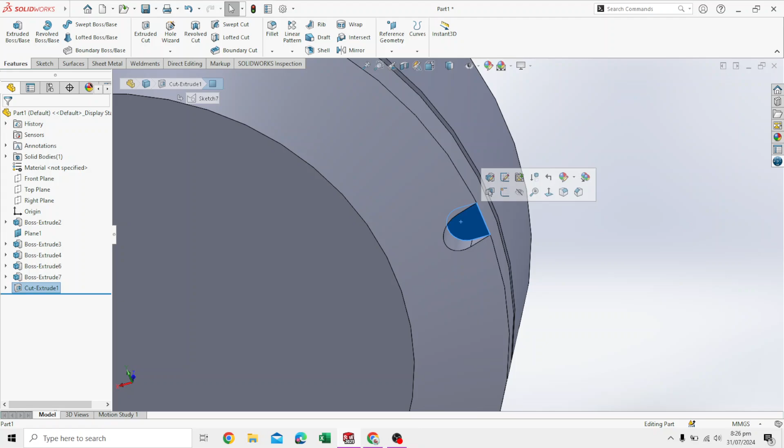Now we will click on this surface, this little cut we made in the previous part of the video, and go to sketch. Zoom in and hold your cursor here so it reveals the center of this curve. We need to draw a circle at the center of this curve. After you select a feature, select the circle and then hold your cursor here so now it shows the center.

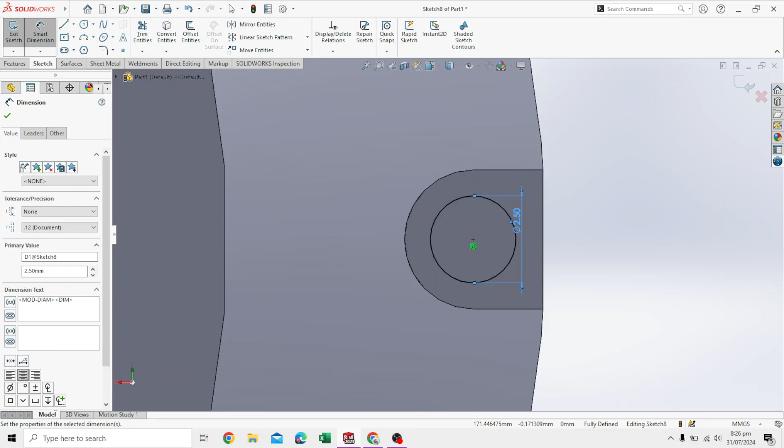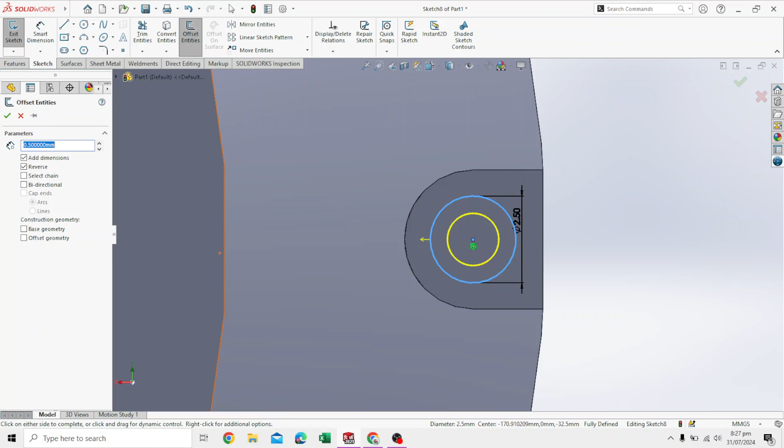We will draw a circle and use a smart dimension, give it a value of 2.5, press enter, and give it an offset of 1 millimeter, and it should be inverted. I think 1 millimeter is way too small, maybe 0.5 millimeters. That's better. Give it an offset and reverse the direction, otherwise it's going to be outside. We need it inside. Give it an offset of 0.5, and okay, this is neat.

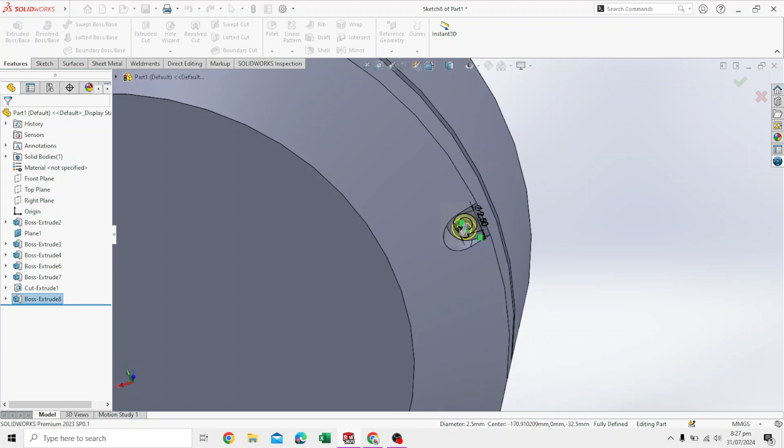This is going to be basically the nut that's usually placed in this kind of indent. We go to features and extrude, move that out by 1 millimeter, press enter, say okay. This is what I need, this is what it's going to look like.

Now we will go to the linear pattern drop down menu and go to circular pattern, first to specify the direction. So the direction is this surface, and the feature to specify the number, how many you want - 7 of these - and then specify the feature. The only feature currently selected is the nut, so we also need from the drop down menu this extrude that we cut out from this surface, and we need a total of 7 of these.

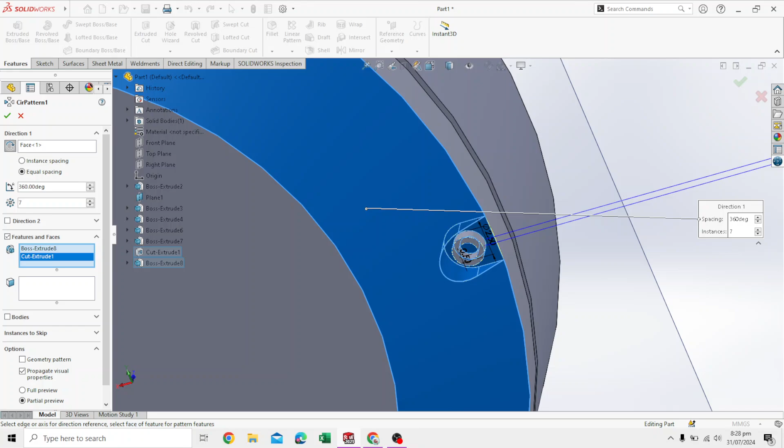There you go, it's showing in the preview. This is what it's going to look like. Let me see if 9 is better, or a different number of these looks better. Maybe 12, because these cuts are quite small.

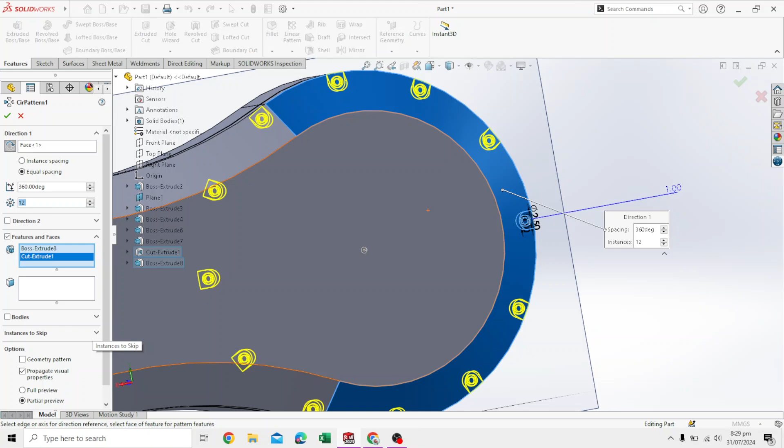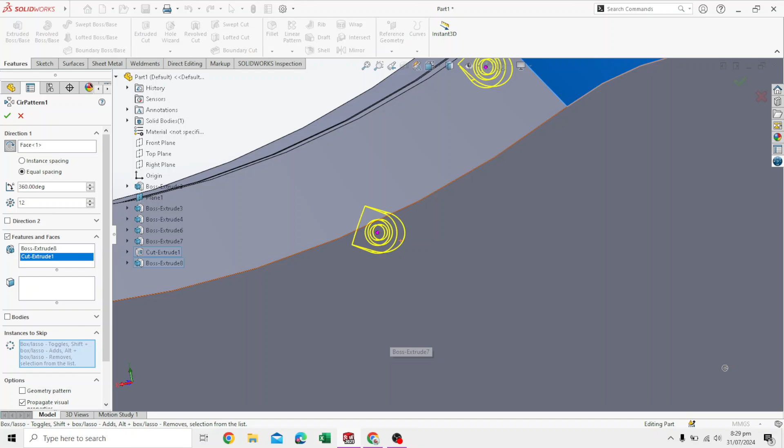I'm going with 12. There is a drop down menu in the left window called instances to skip. You click that and you will see these pink buttons appear between this, so we'll skip that one. Let me see if we have to skip that - I don't think we have to skip this one, it's sort of in line with the others. So skip this one and skip these. The rest are in line, the rest are looking great. Say okay, this is what we need, and there you go. This is sort of the pattern that's created with this circular pattern feature.

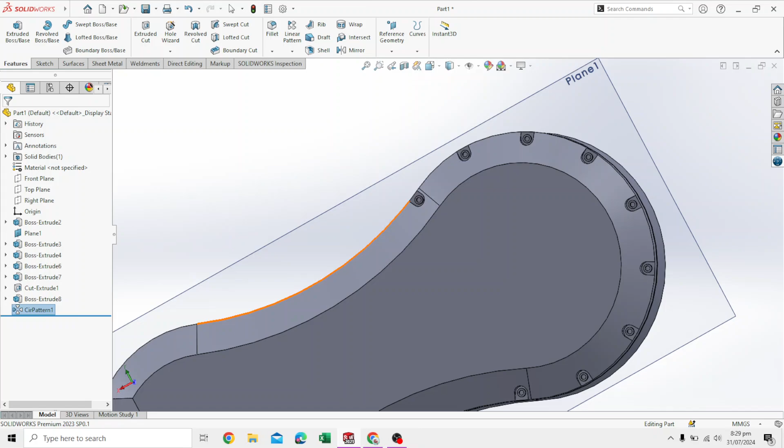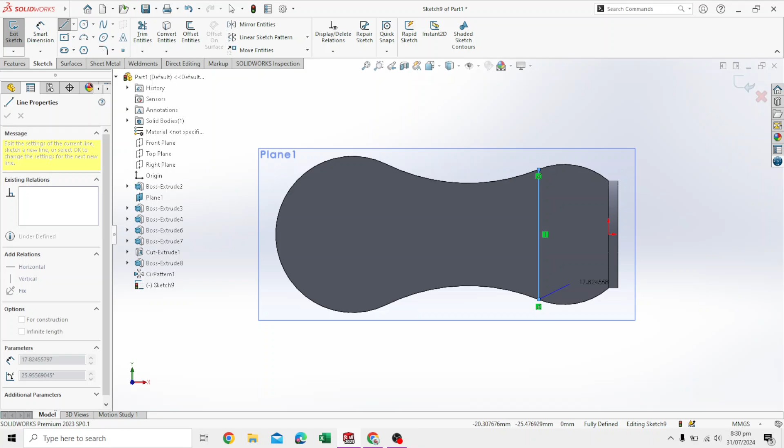Now we will move on to the back of this and say sketch. In the sketch we will draw a line - if you hover here you will see this point - move from this point to the other side, and there will be another point similar to that. This is the line we drew, and click on this face, basically this entire face, we need this all, and say convert entities. So now we have a drawing that looks like this.

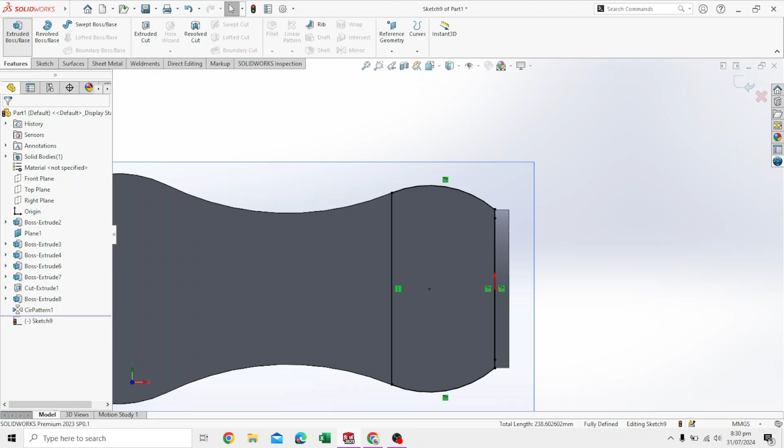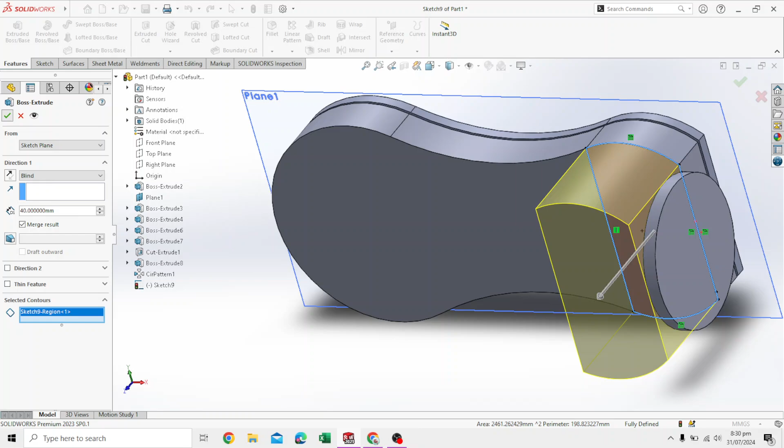Go to features and extrude this by clicking here. This is what we need to extrude, and give it a value of 40 millimeters, so it should come up to the edge of this circle. We say yes, this is what we need, and okay. This is what you should have by this point in the video.

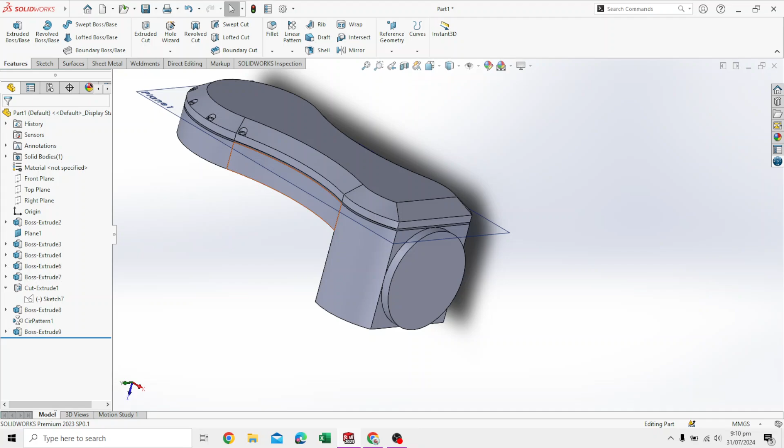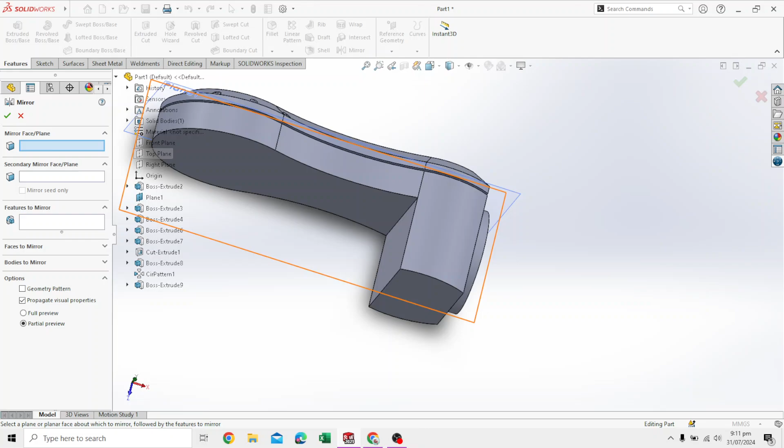Moving forward, we've already extruded this. We will basically mirror this entire body onto this side as well. Let me use the mirror command to move this entire structure onto this side. The mirror, and then obviously the mirror face or plane about which we need to - we'll open this drop down tree and select this plane, the front plane.

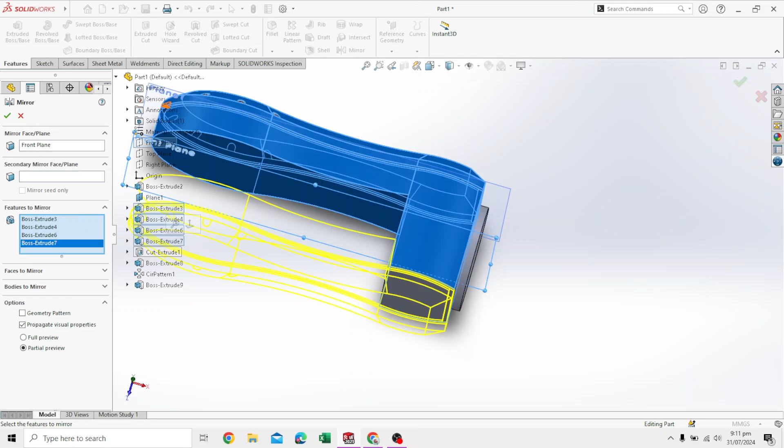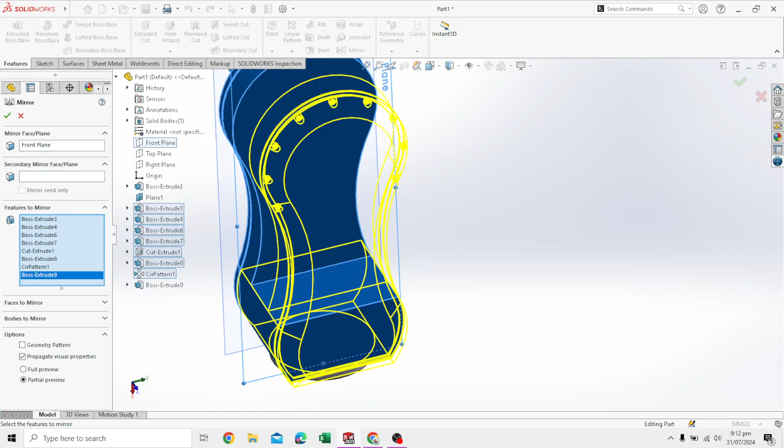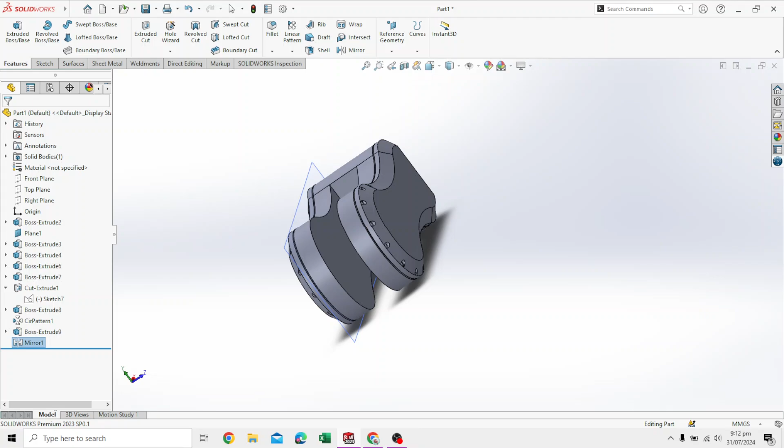There we go, this plane. Then we would say features to mirror, and in this we will select all the individual parts - this, all the features we've made so far - these circular patterns that we applied, and then this extrusion. I don't think we need to apply the extrusion because that is already connected, but let me just do it regardless. You can inspect it and see all the individual parts as it should be, so there's no missing cuts or anything. You can say yes, this is what we need, and there you go. This is created. Let's move on to the next part.

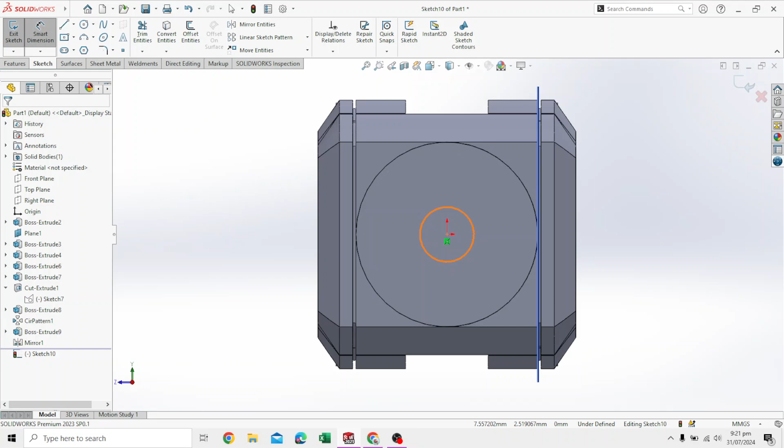Okay, so the finishing touches include drawing on this surface - sketch here and select a circle from this center. The dimension will be 30 millimeters, and we will extrude this feature by 20 millimeters, press enter. This is how it should look like. Say okay, this is neat.

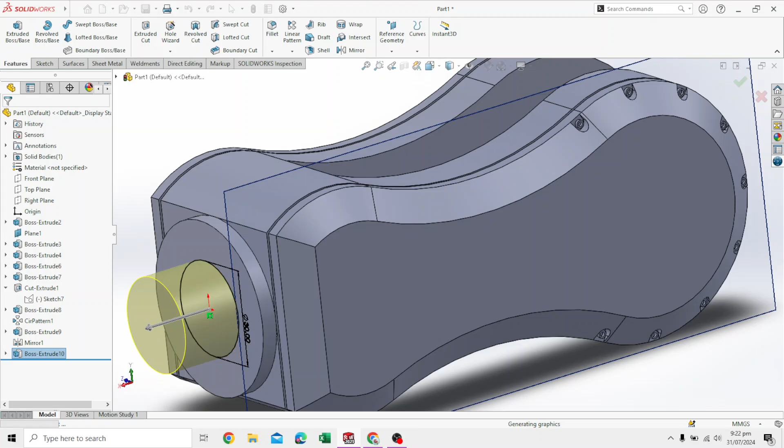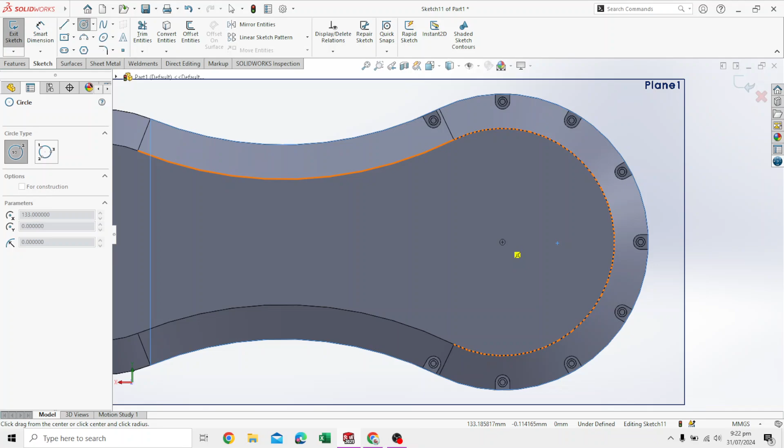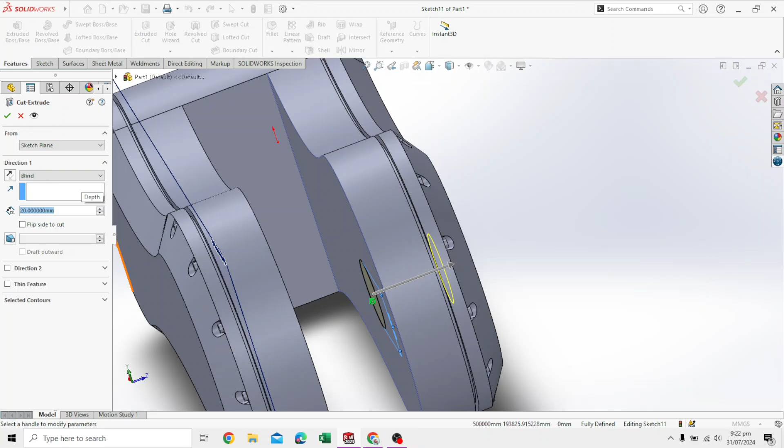After that, the last two features we need to draw: basically draw on this surface, and since you're drawing inside you won't be able to see what you're drawing, but we need a circle at the center. Just hover your mouse here for the center. This is how much you want it to be, and this should be 20 millimeters. Go to features and we go extruded cut, and we extrude this cut by double clicking this, and this is how deep it should be. Say okay, this is what we want. Move and make a hole here, and the same thing on this side.

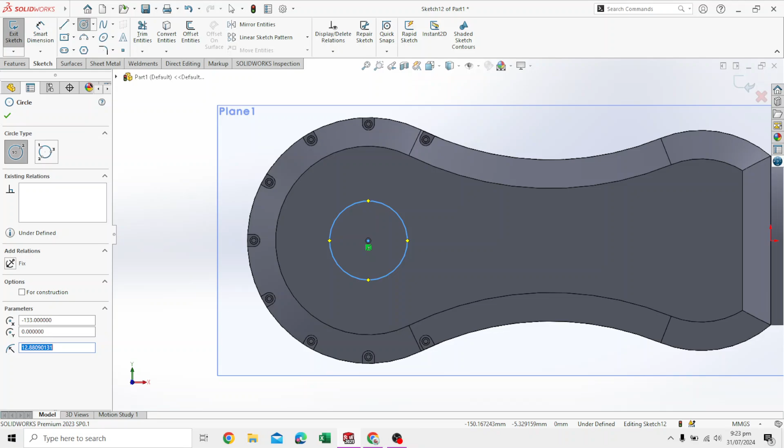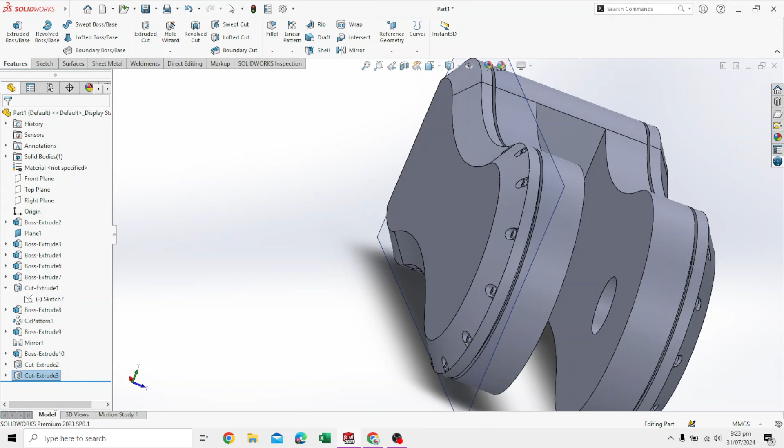Go to sketch and draw a center circle. Hold your mouse here so it reveals the center. Draw a circle, smart dimension, same thing here, 20 millimeters diameter, and we will cut this by 20 millimeters, already pre-selected. So now you will see two holes that will be used to connect the next part in this design. So save this, and we will move on to the next few parts, after which we will start assembling.